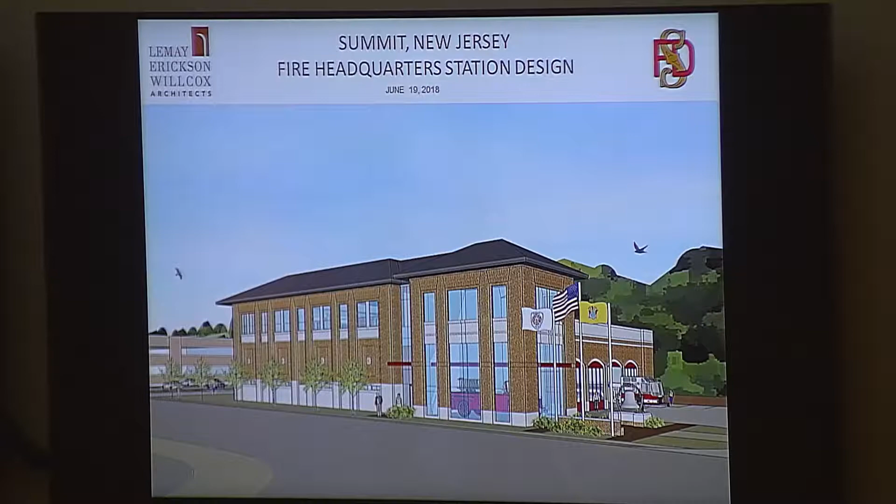So we're going to go through focusing here moving forward on these steps of the schematic design that we've recently completed. Just a quick vicinity map view of the proposed station relative to where the existing headquarters currently is located.

This was a key issue as we were discussing and evaluating sites. I know the department had looked at this a good bit, but for response times being the key factor in consideration of where to locate a fire station, having it still near the center town base, but providing adequate access to the main thoroughfares to get across the city, is certainly very important.

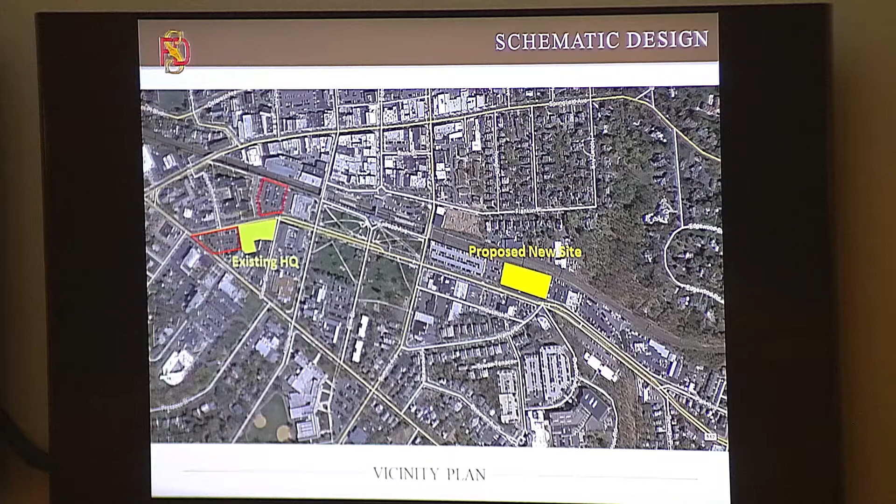So the new site over on Broad Street, just down to the parking lot, is about a third of a mile from the existing site. So all those response times would still be very central to where they need to be.

Quick overlay showing the basic site plan configuration. One of the key components—and do I have any means of pointing with this? Maybe not. I'll stay here.

One of the key considerations as we look at this site—my partner Paul Erickson refers to the necessary space for apparatus bays and the aprons on either side as an aircraft carrier. It's a very long linear space that largely dictates how you use your site. You have this length space that's typically 80 to 100 feet for the apparatus bays themselves, but then you have a large apron of concrete to the front and back that is upwards of 150 to 200 feet in this rectangle, which is very much what you see laid out here.

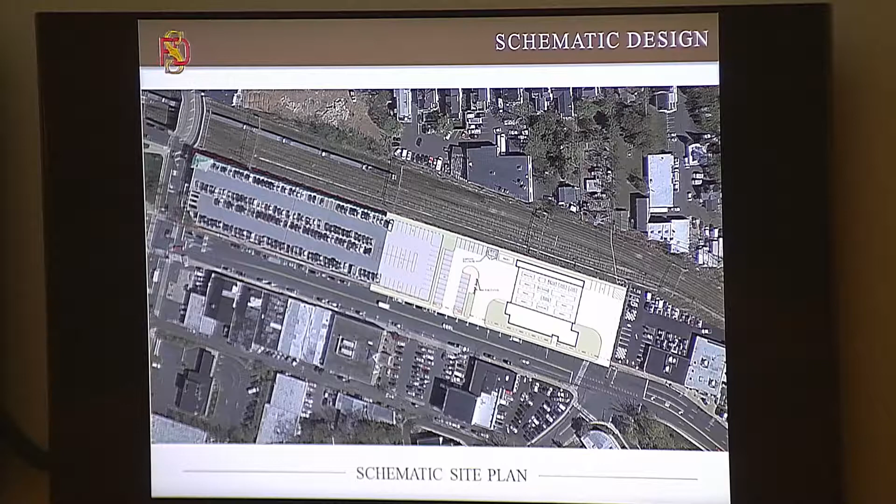It's why the building is rotated to allow that U-shape kind of configuration, the saddle that comes back out to Broad Street, with the main response coming out to the intersection, so that can be signaled and controlled. This intersection allows both access east and west on Broad, but also directly into one of the residential neighborhoods, again with a heavy focus on response time. For both site design and the building design itself, that's a key consideration in everything we do: minimizing the response times to get the firefighters out to do their important business.

As we zoom in a little bit closer, see some of the other amenities on the site. We did take into account, having read the recent master plan work, understanding this end of Broad Street is very much going to be a gateway and entrance point to the city. So you'll see as we climb into the floor plans, that front corner towards the intersection has been developed truly as a visionary entrance point.

You'll also note we've accurately dimensioned all of the vehicles that will be housed in the apparatus bays. Only one of those represents a future piece - there's a future EMS, future ambulance accounted for. All other of the 13 of those 14 pieces represented are current pieces, some of which are currently housed in the bays.

Others are left out in the weather, or even their swift boat that they can't leave inflated because they have no place to park it. So in the need for it, they have to go inflate it before they can bring it to use. So one of the key components in developing the program was providing bays that can adequately store and protect all year round all the equipment that they have, and anyone from the department can speak to the expense of each of those individual pieces that'll be housed in those bays and now protected.

We are carrying over fueling stations as are provided in the current facility, and then the parking that's primarily there for the staffing for the facility.

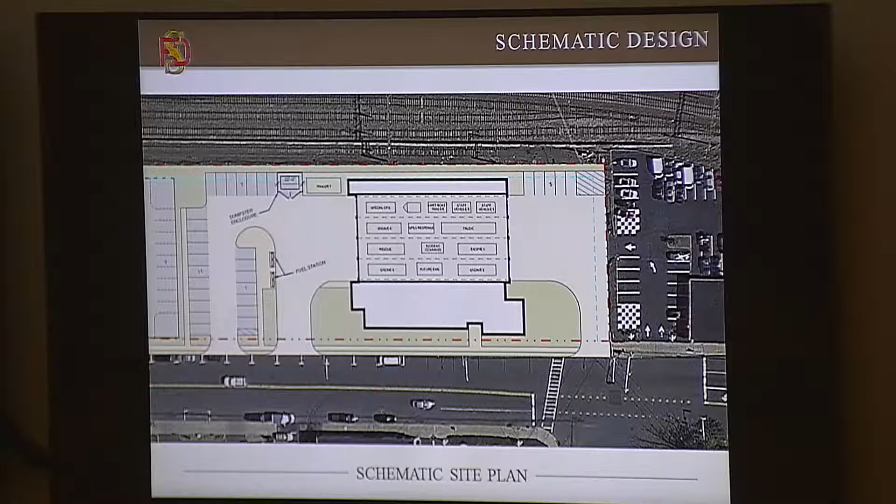Looking a little more closer at the floor plan, one of the key issues my partner Paul Erickson has taken to heart and spent a lot of time researching and developing is what we call hot zone design. Firefighters are exposed to an amazing amount of chemicals and contaminants, fluids that are very dangerous. How we are able to provide a facility that allows them to come back, be decontaminated, and keep those contaminants in a controlled area of the building is highly important.

So we want to separate those spaces, create clean spaces, and create important transition zones so they can come back from those events, be cleaned, and not carry that back into their own work or living spaces in the building, and even more so, not back into the community to their families and others.

This facility, by its nature and the site availability, is going vertical. So what you'll see on the first floor are primarily the bay spaces for the vehicles and the bay support spaces - places where they keep their protective gear, key decontamination spaces, and shops and other things very much related to the bay activities.

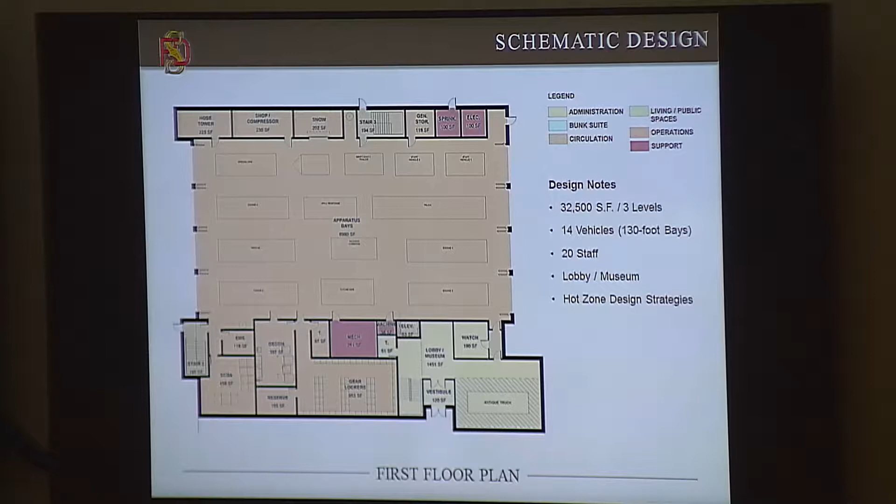All of the administrative offices and housing or the bunk rooms are located up on the upper level of the building. In the bottom right in yellow, that is a special location to house the antique fire truck that they currently have, ideally with some glass and high visibility, again to that kind of gateway corner of the building. It'll be a very nice little museum corner available through that front lobby.

One of the key components we also look at is the visual control. Next to that same space is a watch room, which allows visual control of the entrance in the building, as well as visual control of the apron. Inevitably, somebody that doesn't know where they're going pulls up and parks their car right in front of the apron and the bay doors. You want to be aware of that, control it, and get them to park where they should if they're coming to visit the fire station.

We do have a mid-level. The bays themselves are essentially double height spaces. We generally design those so that the cabs, which tilt forward, can be opened within the bay space in case there's any minor maintenance. They would be doing heavy work elsewhere, but if they need to pop it open, the ceiling height allows that to happen within the bays.

But that same height that the bays already require allows for mezzanines to each side. One of the key components cited in the report, which we've talked a lot to the department about, is the importance and value of training incorporated into the station. They are there 24/7, 365 days a year - the ability for them to occur or maintain training opportunities while they're in-house is highly valuable for what they do.

So we've incorporated mezzanines on either side of the bays, where we can set up opportunities for training to occur. It can be as simple as ladder evolutions, but again, it's fully enclosed - they can do it no matter what the weather. There could be 24 inches of snow outside, or it could be 90 degrees in the summer. They have a place where they can get some training done in the course of the day, which is excellent.

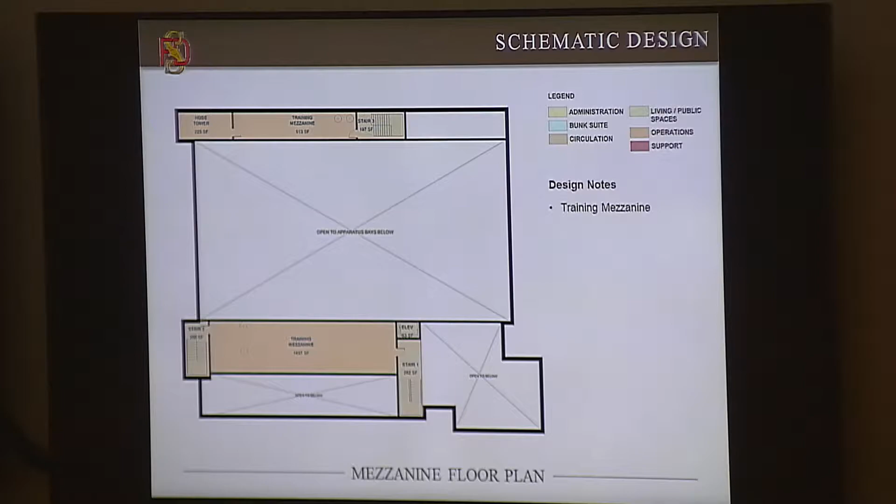And the opportunity to have those mezzanines on both sides - one of the facilities we've reviewed and talked with Paul and others about is our Charlottesville facility, where potentially we can even get some connections across, and you can do high ropes across from mezzanine to mezzanine. Lots of things that we can incorporate in a very inexpensive way within that space that's already provided by the bays.

Up to what's effectively the third level of the building, we have the administrative offices and the house, which is kind of the kitchen, day, dining, and bunk areas. It's one continuous fluid space, which is very valuable for interactions, but it's also fully separated.

The front side that faces the street, that faces Broad, is the administrative wing. This is a headquarters station, so we have more offices than what might be in a typical smaller fire station. The chiefs, the officers, the education group all have dedicated office space that's fully closed off and separated. There are doors connecting the spaces, but they have their privacy, as do the day spaces for the firefighters.

We had talked relative to the EOC program about the availability of showers and bunks and other things that can be accommodated as needed if any of the leaders that need to stay there overnight will be provided.

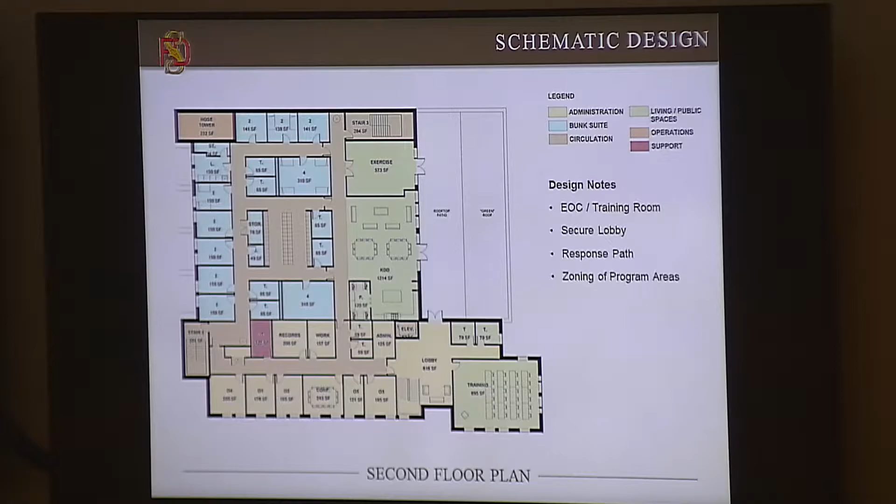My partner Paul talks a good bit about how the inside of the station belongs to the firefighters, the outside belongs to the community. So we've focused here on the intentions of really how the building is going to flow and operate for the firefighters to allow them to do their work as well as possible.

As we move to the outside, now we're starting to talk about what's going to be owned by the community and the city, and how it's expressing the environment and the attitudes and the aesthetic that's appropriate for this community.

We had a lot of conversations in developing this about what was the right balance of something that speaks to some of the traditional language we see around the city with some of the brick and light stone, but also something that looks like it's going to be constructed in 2020. It's not trying to be historicist, but it's trying to be respectful of the community that you're in and what the right vernacular would be.

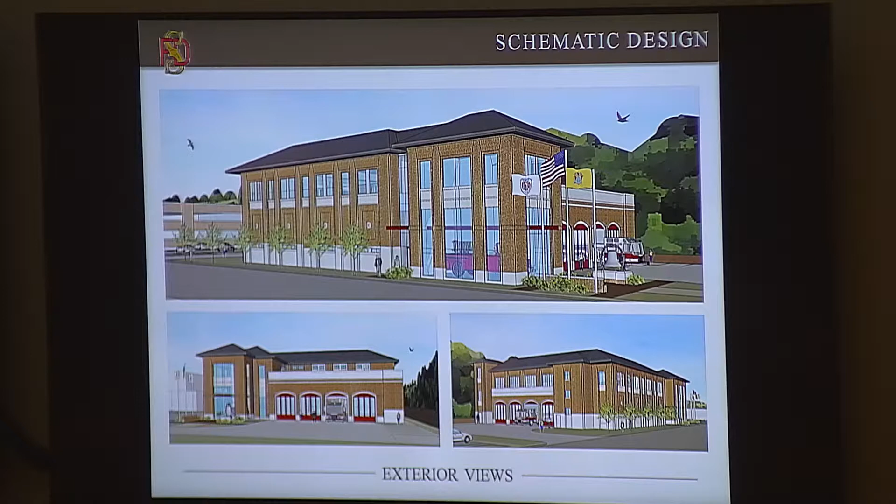This view kind of gives a sense. One of the items I read in the master plan report and talked to others about was a sense of cityscape and how the building is set back appropriately, enough width for trees, but not set too far back. We have a lot of program to accommodate, so we did talk about it, and effectively the face of the building is close to alignment with where the face of that parking garage is.

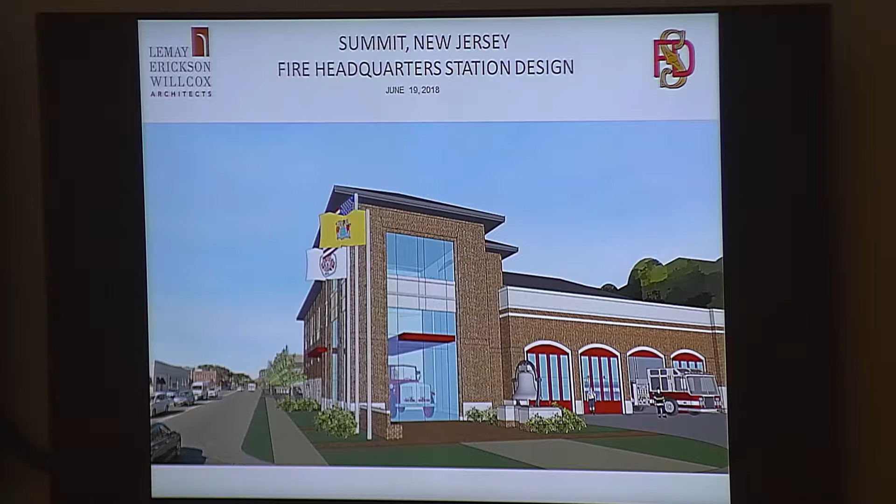It's actually set back just a little bit more, so we have a little bit more space for some trees and potentially some benches along the way.

One of the important items we know that we had talked with the department about is the existing bell and finding a home for that. It's sitting over in the corner with a small memorial garden. Likewise, we found a place for that here at the front to create a little plaza center, so it's kind of a drive-through where the truck can come out when it's used for its ceremonial parades and such. But it's a nice little place for the flags and the bell to provide that entrance on that gateway side of the facility.

And those are the key points. I'm happy to review any details of our process or any design thoughts, answer any questions.

Thank you very much. I'm sure there's questions from folks. Before we go to questions, I want to give the context for the public as to why we're doing this right now and frame the discussion.

So three different items. One is, why are we looking at the fire station right now? Obviously, the battalion chief talked about how old the current building is. It's over 100 years old. We last had renovations in 1968, which is the year I was born, so that tells you.

That's some time ago. But more importantly, we are going through a redevelopment looking at Broad Street East and Broad Street West, which includes the property where the current fire station resides. Among the questions that people always ask is, what's going to happen with the fire station?

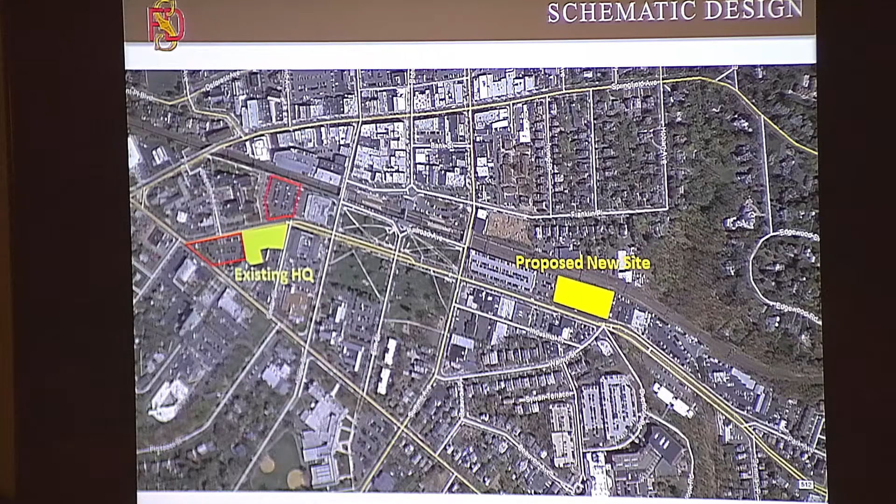The one you just mentioned, behind the post office, we did look very closely at, and unfortunately just the proportions and the depth of the site weren't adequate for the bays and even a single apron. We had considered maybe a back-in-only layout, which is not ideal, but we studied that, and there just wasn't depth even for the bays and a single apron to fit on the site. So very quickly, as we looked at the benefits of each site, the east end was definitely the preferred and better site.

Anybody else? Okay. Anyone from the public have any questions or comments? Seeing none, thank you very much. Thank you for coming up. We appreciate it. And we'll have a continued conversation, obviously. Thank you.